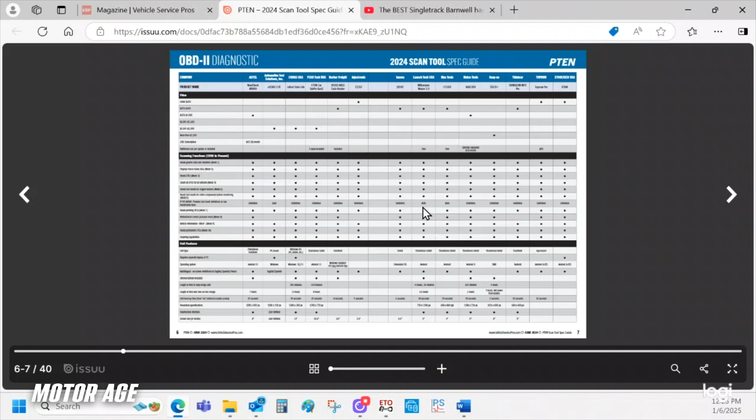I first want to begin by offering a special thanks to fellow editor Emily Markham of Professional Tool and Equipment News for her excellent job in creating the 2024 Scan Tool Spec Guide. As mentioned before, this is an extremely comprehensive spec guide that covers a wide array of functionality for many scan tools across the automotive industry.

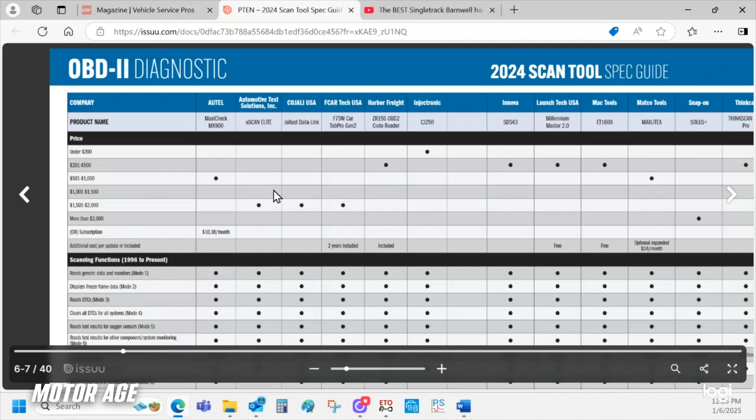Beginning first with OBD2 diagnostic functionality, modes 1 through 10 are featured here. And the point I want to make is component functionality can be manipulated through mode 8 of our scan tool, which is bidirectional control.

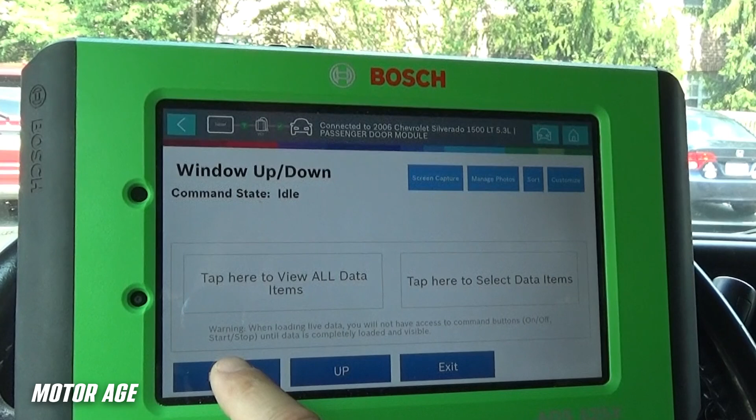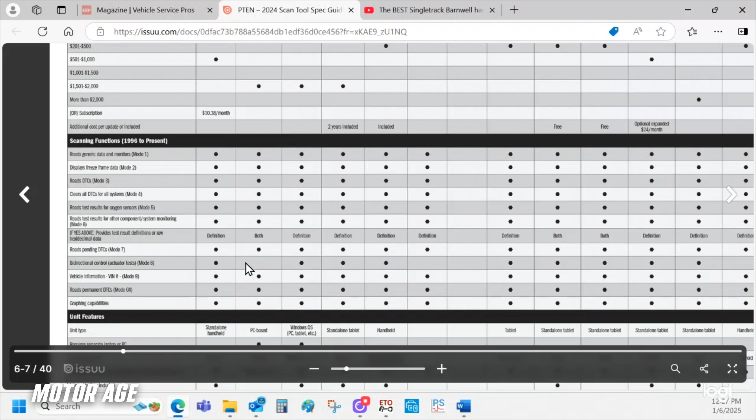Being able to manipulate components of systems, or system tests, allows us to determine preliminarily if something is functioning or not, which allows us to determine where we want to spend our time under the hood. Not every scan tool offers bidirectional control.

Regarding our professional line of diagnostic scan tools, functions like graphing live data PIDs save a ton of time. Not every scan tool offers that, and even the ones that do range from only 3 parameter identifiers up to 25 parameter identifiers displayed at the same time. That means more diagnostic capability, especially when it comes to drivability.

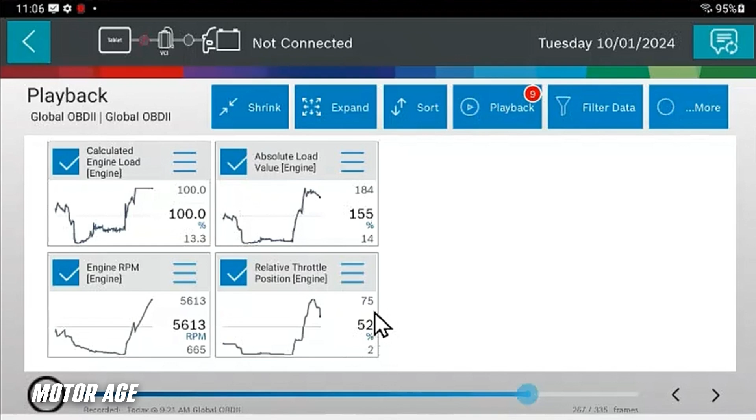Being able to graph data PIDs means not having to stare at the screen while driving the vehicle. It also means looking at data over a period of time instead of just a moment. So action, reaction, comparative measure can be carried out, and a history of that information is stored within the scan tool buffer.

While on the same page, we can look at J2534 capability, allowing us to not only replace ECUs, but giving us the ability to drop or update software within them, and even configure certain ECUs.

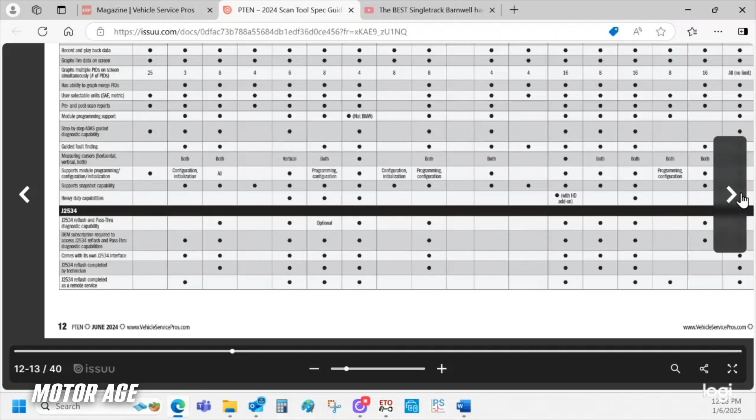With the wide array of ADAS functionality implemented on today's vehicles, this scan tool spec guide serves to show us just what tools can do what ADAS functionalities on which vehicles.

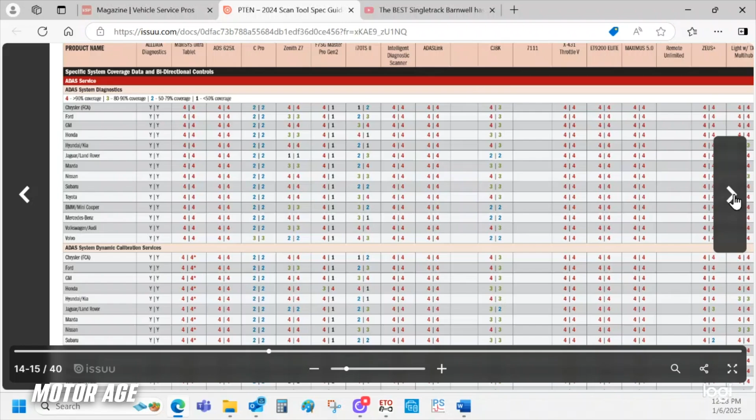We can't forget about common scan tool functionalities like body control, chassis and braking system, and HVAC functionality. These are all really important on today's vehicles, as it's always been.

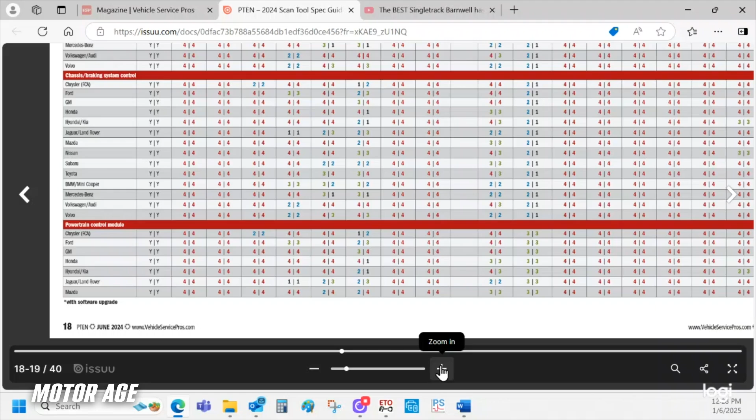We have to remember that many of us are on the road offering mobile support solutions to shops in our surrounding areas. Being able to offer security functionalities like locksmith capabilities, key and immobilizer programming is imperative.

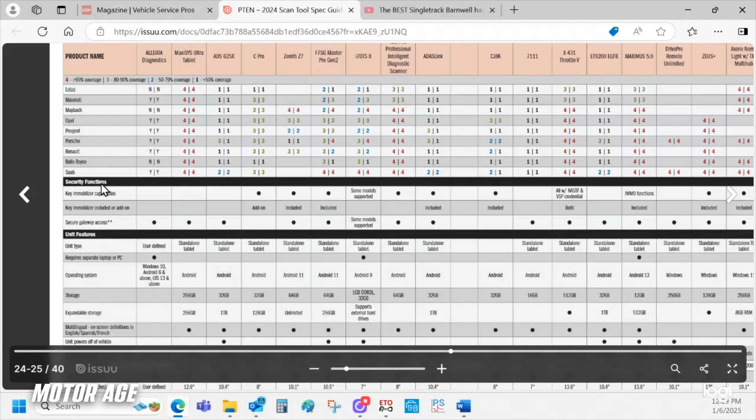Factoring in functionalities like Wi-Fi capability means we can take screen captures and files and upload them to the cloud or a thumb drive, or even implement them within our digital inspection reports, just like our pre and post repair scans. Does the scan tool come with free software updates?

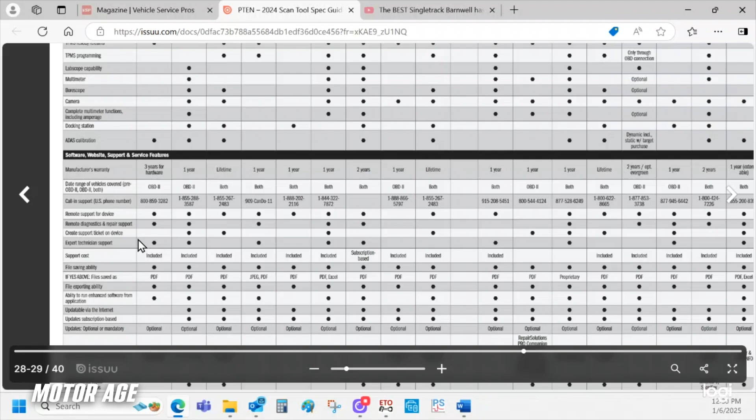If so, for how long? If not, how much do those updates cost? Does the scan tool come with technical support? Technical support for the scan tool itself, or also technical support regarding diagnosis and repair of the vehicle?

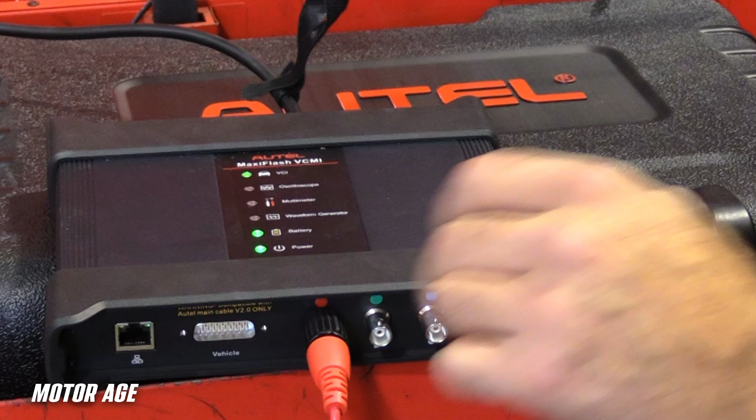It's always wise to consider certain add-on features like a borescope, a camera, a 5-gas analyzer, and even a multi-trace lab scope. Standalone, these individual accessories cost thousands and thousands of dollars. So having the ability to add them as an accessory to your existing scan tool is a tremendous plus.

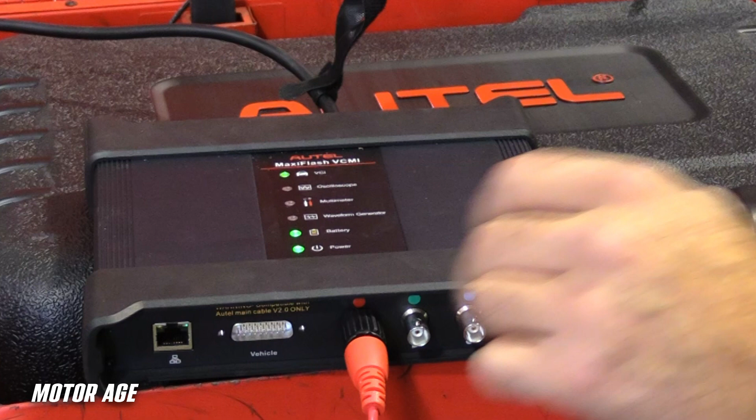These are all important questions that are not always thought to be asked at the time of purchase. It can make the scan tool well worth the money invested.

Leveraging the power of PTEN's 2024 Scan Tool Spec Guide means getting organized. Having the right information in front of you so you can make a proper decision on the tool that's right for you, your shop, and situation.

I'll be the first to admit that choosing the right scan tool is a daunting task, but it's easier than it appears when you have the right criteria in front of you.

Leveraging PTEN's 2024 Scan Tool Spec Guide gives you the ability to choose a scan tool that offers just what you need, and not anything more or anything less.

Being able to research this information ahead of time, before you're stuck with a scan tool that gives you buyer's remorse, gives you the ability to morph your business into something more, offering newer capabilities to allow you to expand into different realms and grow your business.